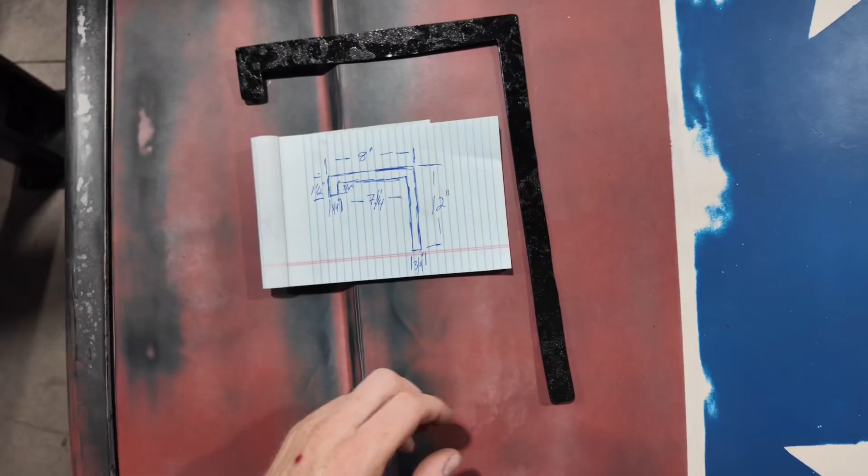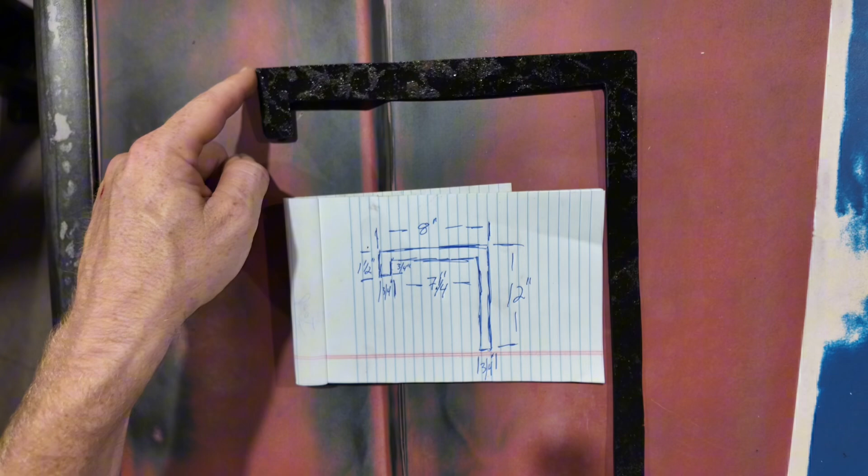All right guys, here's our tool laid out with the little sketch I used to make it. This is made out of 14 gauge steel, I had a piece laying around in the shop, so I cut it out on the bandsaw with a cutoff wheel. So what we've got going on is 8 inches across the top from right here out to the end. The inside of this is 7 1/4, 3/4 inch wide all the way around this whole dimension, roughly - it wasn't cut very straight, but it's roughly that. And then from the very end here all the way down to here, it's 12 inches.

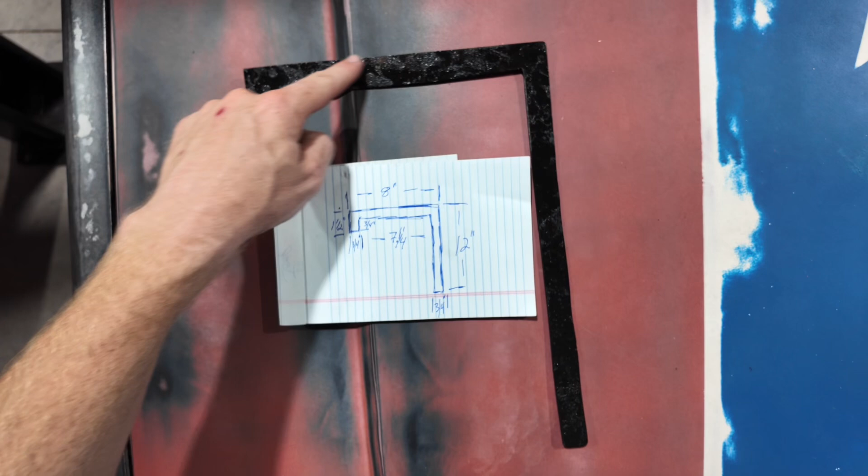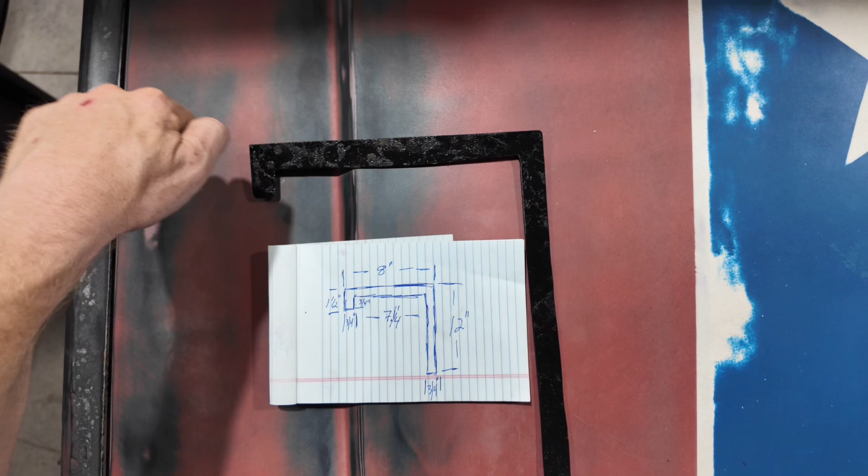So 12 inches, 8 inches, and then 1.5 inches down right here, 3/4 of an inch wide like I said, and then 3/4 of an inch right here at this spot. So there's the drawing - pause the video if you need to. This is what I used, 14 gauge steel. You could try using a coat hanger, but I feel like it's just going to bend on you. You can make it out of round bar if you want, but this thin metal will really help you get in between the hood and the grill, and you'll see that here in a minute.

And the way this is designed, it will not bend out, right? It's solid. So when you're pulling that to pull the latch, this isn't gonna bend out like a coat hanger or something like that would.

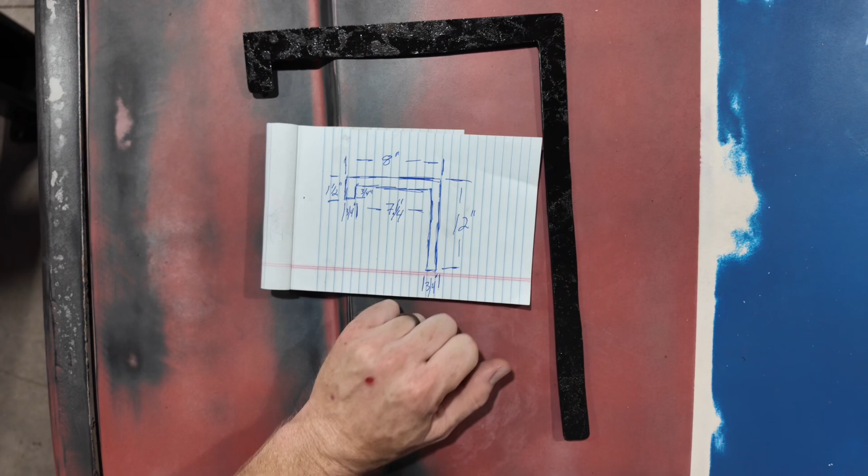So let me pop the hood here and show you how the latch works. All right, so we got the hood open here. And when you come in through here, now here's the deal. You're gonna have a spring sitting right here because on the hood there's a spring. That's what pops the hood up. So that's gonna be sitting here in the way when the hood is closed. So you won't be able to come straight in here.

You're gonna have to come up and around that. You also have this cable, your release cable. So that will be in your way if you're trying to come in through here. You might hit that. Now, you can't access anything from the front side with the latch mechanism whatsoever. You have to come around to the back.

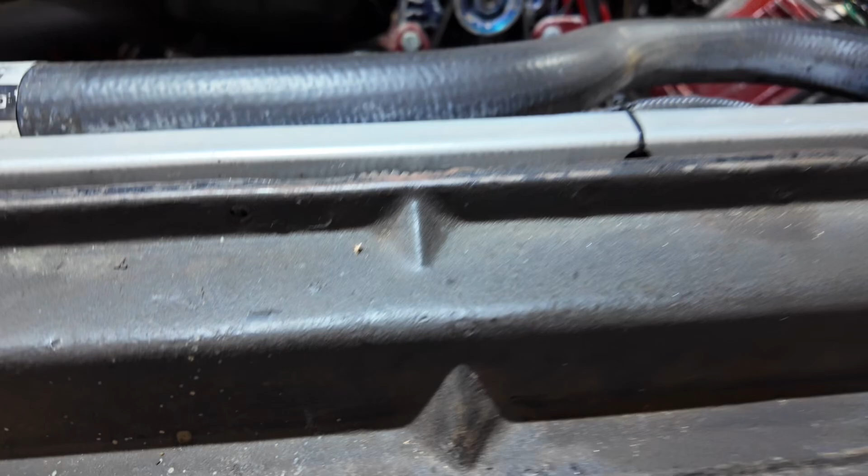So in order to do that, let me bring you around. All right, now we're on the back side of this thing. It's in the unlock position. This is the cable that comes out, your release cable. It'll be pulling on this lever.

Now, I did run into an issue on my Blazer. If this is frozen, which mine was, I was able to pull it here like this, but did not know, because I can't see it, it would not return. See, it should return like that with this spring.

Now, if it's frozen, you run into another issue. It pulls like this, rotates like this, but see, it will not open enough for you to get your hood open. It'll just stay just like that. And I was pulling and trying to get that hood to come up, it would not.

So I had to come in from the backside, see how it opened when I let go, and push this lever to get that to rotate like this so we could open the hood. Just something to think about.

So when you're doing this, because I ran into the same thing recently on that K5 Blazer, when I opened that hood, I'll show you one more time. Let's say this thing freezes, pull it, it unlatches, your hood will come around, and it's frozen. And it will not allow that hood to open up.

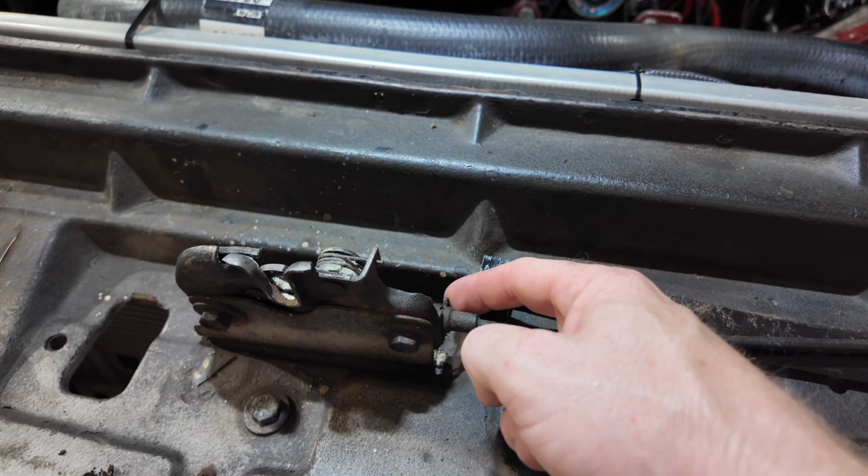You're gonna kind of just jiggle it, then feel from there. Let me bring you around here. Once you come in, you can feel and hit the back side of that, and it's all by feel here because you can't see anything. Then you're gonna push it in a little more, and you'll feel it grab your latch.

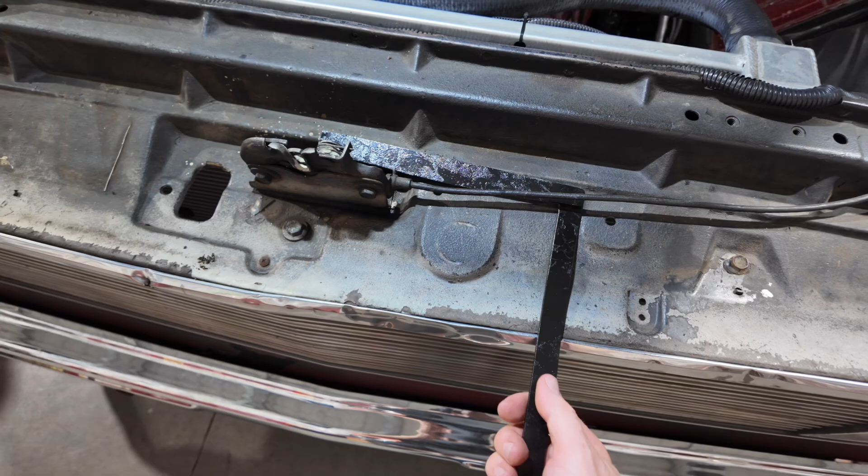You'll just pull it just like that, and that'll unlock your latch. You can see with the design I have here, we've got plenty of handles sticking out so you can really actuate that thing and get some leverage to pull it in case it's stuck. Now that we went over the tool itself, the dimensions, how you're gonna make it, and how the operation of the latch works, we demonstrated how you're gonna snake it in there.

It's time to let the rubber hit the road. We're gonna close this hood, and I'm gonna demonstrate exactly how this thing works to open the hood, so you can get your project back up and running, or that barn find you wanna check, maybe you got the big block Chevy, the score of a lifetime, maybe a 400 small block. We don't know what's in there, but this is gonna help you get there. Let me close the hood, and we're gonna pop this baby open.

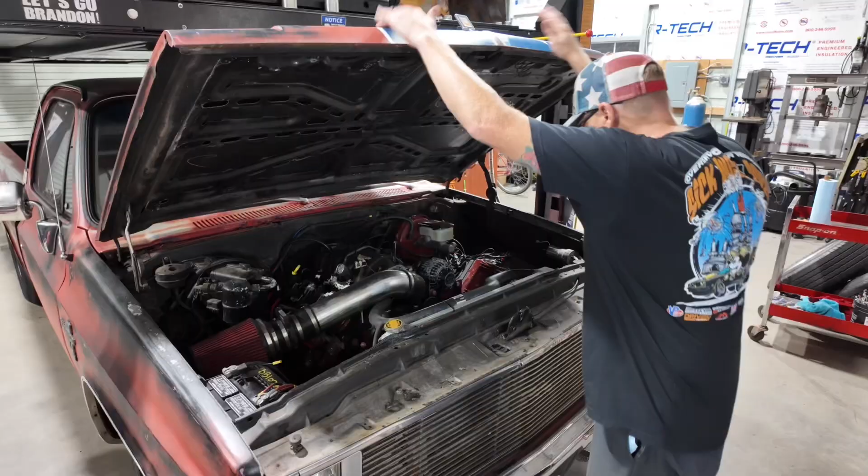Yes! All right, that's tight. How are we gonna get it open? We got no hood cable. So, center of the hood is where your latch is, and about in here-ish is where your spring is.

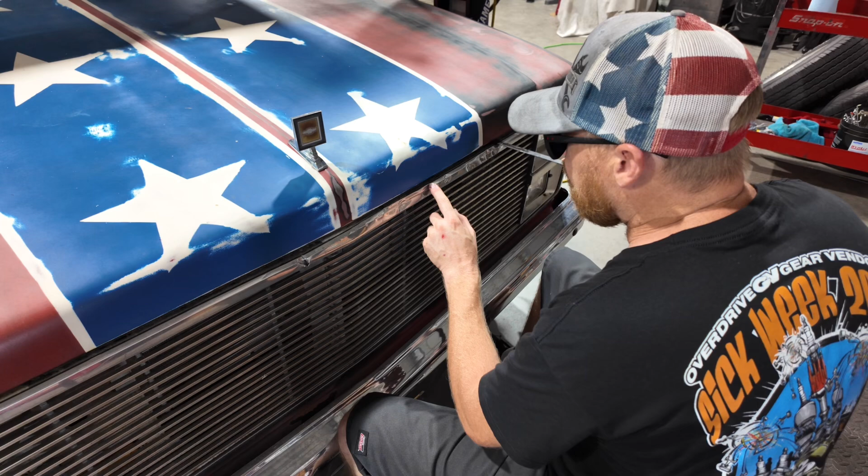You can actually take your tool and feel for the spring if you want. So kind of feel, now I know that's the spring right there. Slide it back, get up under that cable, and you can get a light and look through here, but I'm gonna try to do it just blind and feel my way around. So get it all the way to the back, snake it in. Remember, you're gonna have that weird spot where you gotta snake it around the body line.

That feels like something there, I don't know. So I'm gonna try to line it up, boom, pull it just like that. We're open.

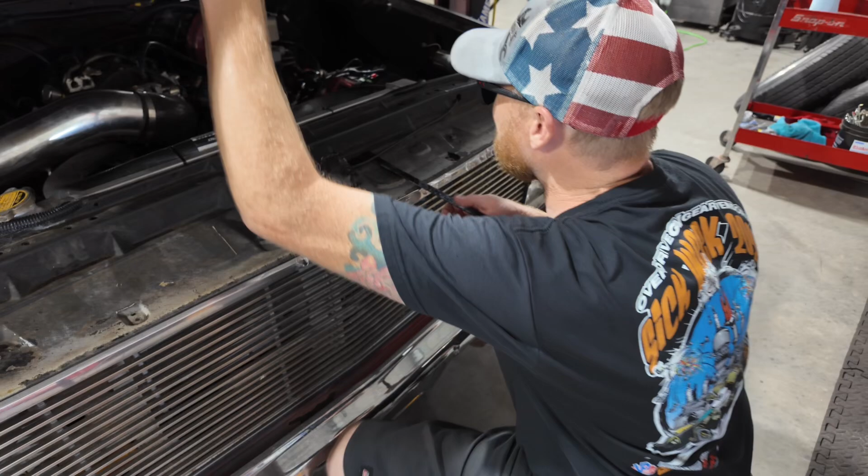LS motor, woo! What a barn find. Not really, but yeah, there you go. That's how it works. Works slick.

Try it one more time if you want. Slide her in, find that spring, come out to the outside, under your cable, make sure you're all the way back. The tricky part is sliding it all the way in there. Find that latch. Oh, I went too far that time. Boom, there it is, just like that. Pop it open. There you go, guys.

A simple tool like this can make a big headache just disappear and go away, so you can get that hood open on your project when you're out in the field. I'm actually just gonna keep this maybe in my truck or whatever. If you ever break a hood cable, you can make a few of these and leave them in your truck, in the floorboard, underneath the seat, whatever, just in case. Unless you're fancy and have a real nice truck and don't ever have to worry about that. With me, it might not be a bad idea to keep something like this in the ride, just in case I ever need it.